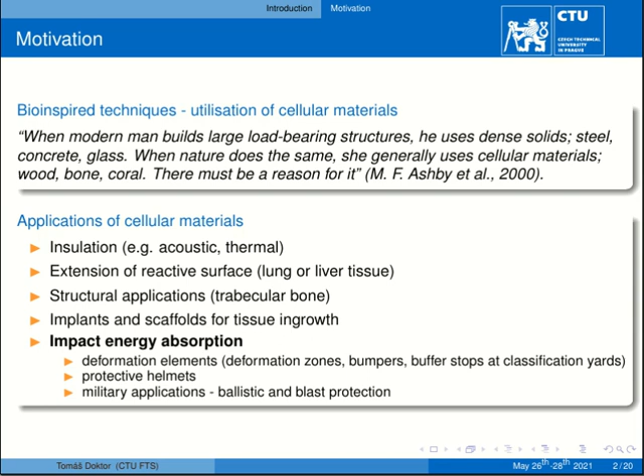The advantage of cellular materials consists in broader selection possibilities of such a material according to the impact scenarios and the intended protective application. The current effort in utilization of cellular materials consists in enhancement of impact energy absorption in such cellular materials, when the cellular structure can have controlled properties and can form a regular lattice, for instance auxetics.

This work is focused on that. This direction was enabled due to extensive development of additive manufacturing techniques.

Another direction for enhancing impact energy absorption properties is the use of filling materials, which form together with the cellular structure a so-called interpenetrating phase composite.

Other possible directions are, for instance, coating of the open cellular structure, which brings enhanced performance, or composition of the cellular structure into sandwich panels. This work is focused on a combination of these approaches.

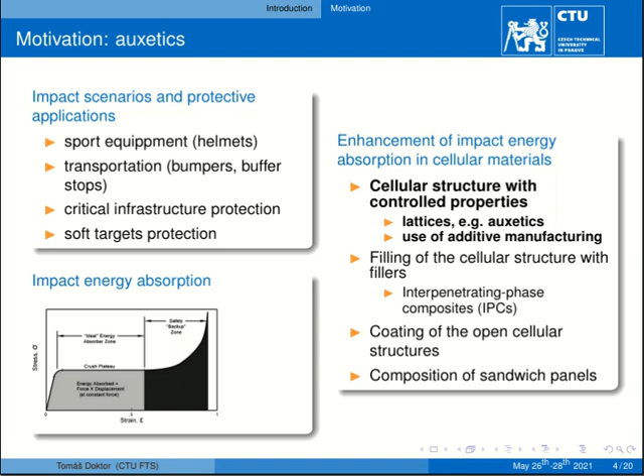Among cellular structures, auxetics are of high importance. Auxetics are mechanical metamaterials which exhibit negative Poisson's ratio. This means that such a structure shrinks under compression, in opposite to standard materials with positive Poisson's ratio.

This brings enhancement of impact energy absorption because the shrinking structure enables concentration of material under the penetrating object, bringing better penetration protection. Such auxetic lattices also preserve the lightweight nature and the possibility to use tailored properties using additive manufacturing techniques.

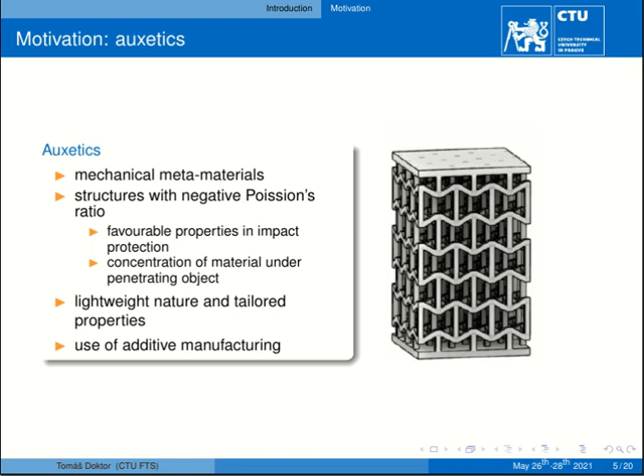Directions to enhance the impact energy absorption consist in filling of the cellular structure with polymeric fillers. Together with the lattice, the filler forms an interpenetrating phase composite.

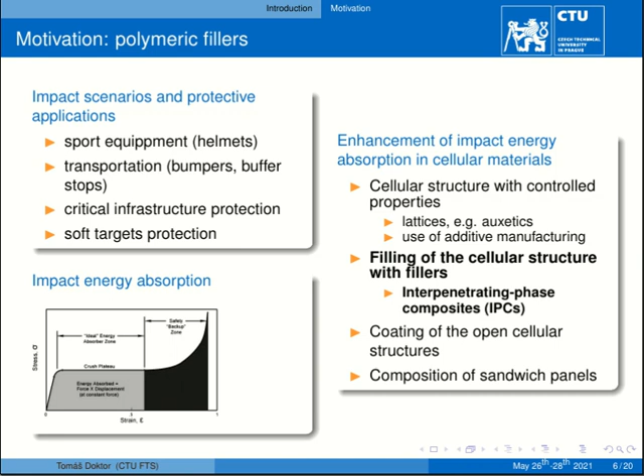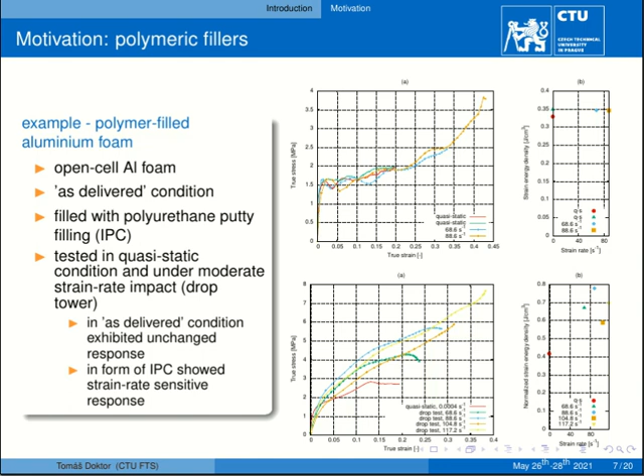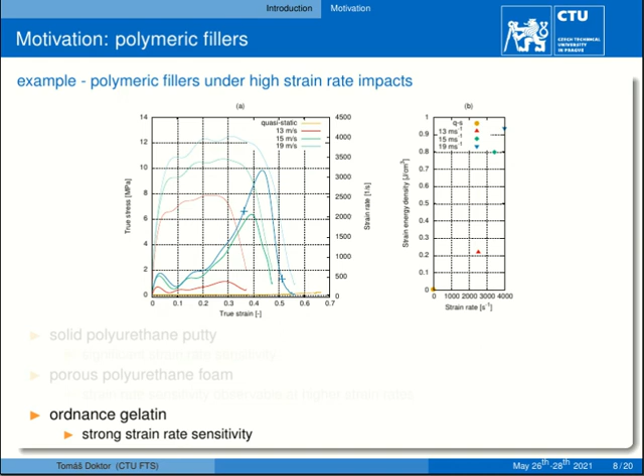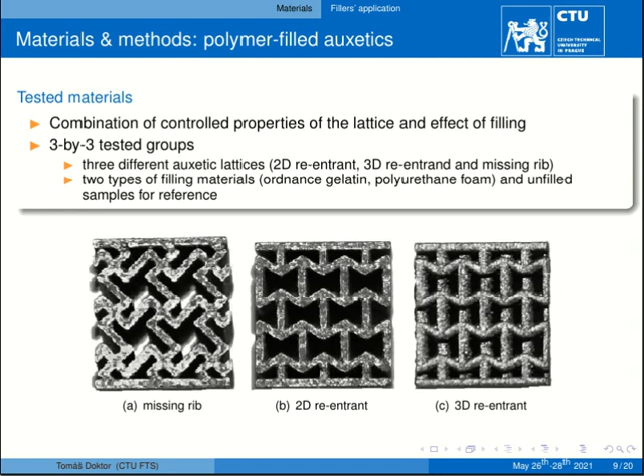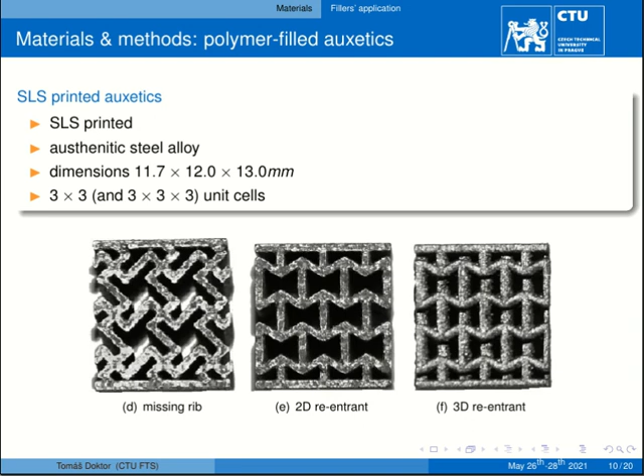In this research we tested a combination of three types of auxetics: two two-dimensional auxetics and one three-dimensional auxetic. These were manufactured using selective laser sintering from austenitic steel alloy, and the design was selected to achieve at least one unit cell inside the structure without being at the contact face.

Two types of polymeric fillers were used: low expansion polyurethane foam and ordnance gelatin, while a third group was kept unfilled for reference.

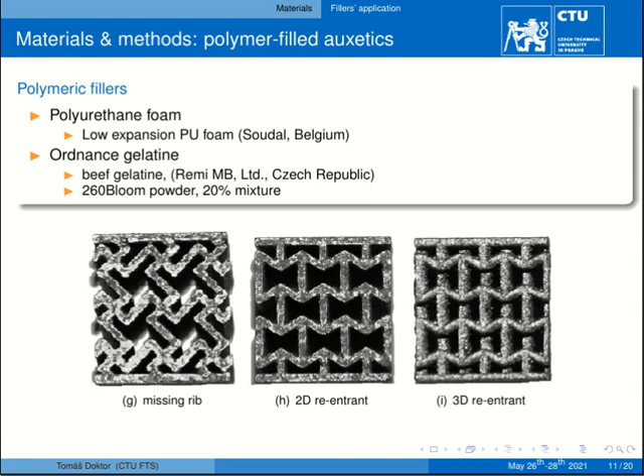The samples were tested in quasi-static conditions and under high strain rate conditions using a split Hopkinson pressure bar apparatus, located at the Czech Technical University in Prague, in the Laboratory of High Strain Rate Phenomena.

This Hopkinson pressure bar is equipped with a 1.6 meter long incident bar and transmission bar, and a 0.2 meter long striker.

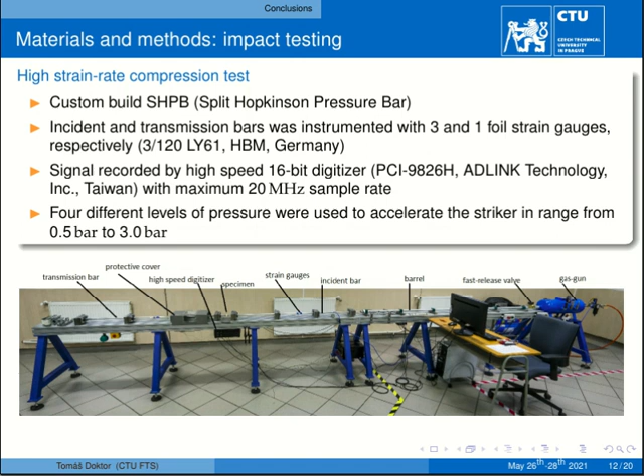The signal from the strain gauges is recorded by a high-speed digitizer, and the loading scene is captured by a high-speed camera with a frame rate higher than 100,000 frames per second, enabling further evaluation of strain at the surface of the deforming sample. These strains were evaluated from the images using a custom digital image correlation tool based on the Lucas-Kanade tracking algorithm.

Using this tool, full field strain measurements were performed from an array of 6x6 features on the surface of each sample. From the displacements obtained by digital image correlation, Poisson's functions were evaluated, and for each sample the dependency between the Poisson's ratio and longitudinal strain was obtained.

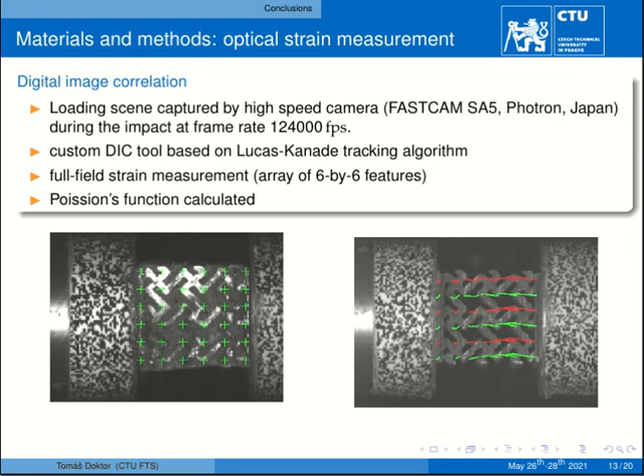For all groups of samples, the results show a slightly positive effect of the filling material on the strain energy density.

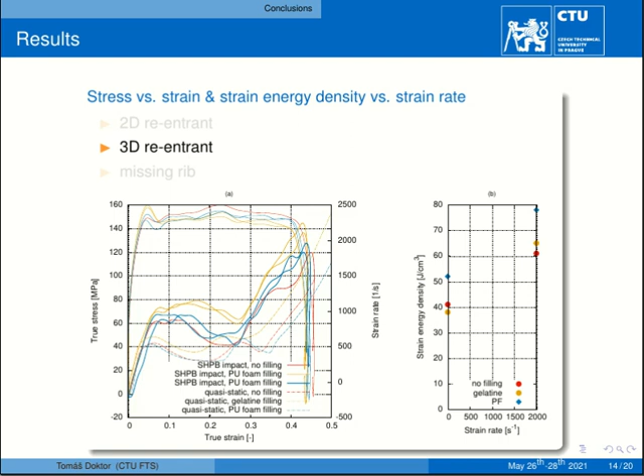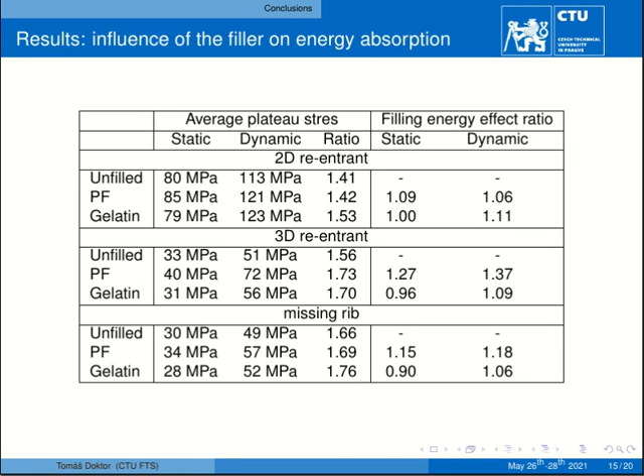In this table, the ratio between unfilled and filled specimens in terms of increase of strain energy density is presented for all types of auxetic structure. You can see that at static condition the increase was not very significant, and even for ordnance gelatin a decrease of strain energy density versus mass was observed. In the dynamic condition, however, all types of auxetics with both types of filling show increased strain energy absorption properties.

Now to the core of the results of this investigation: while the filling exhibits a positive effect on energy absorption properties for all auxetic materials at tested strain rates, the auxetic behavior is suppressed due to the presence of non-auxetic material in the auxetic lattices. The presence of the filling is thus a trade-off between the auxeticity and the enhanced energy absorption properties.

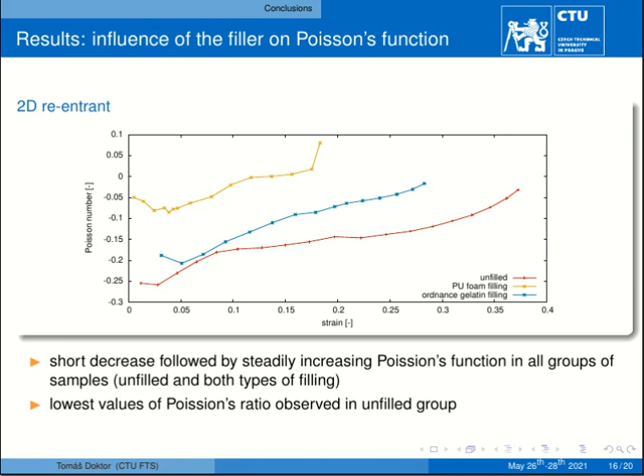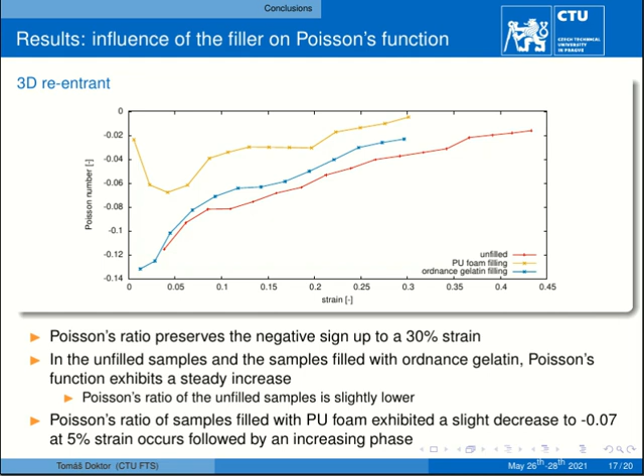For all types of structures, the lowest curve of the Poisson's function is observed for the unfilled samples, while the filled samples exhibit a similar shape of the Poisson's function but with a higher Poisson's ratio. The same pattern repeats in the three-dimensional reentrant samples and also for the missing rib samples.

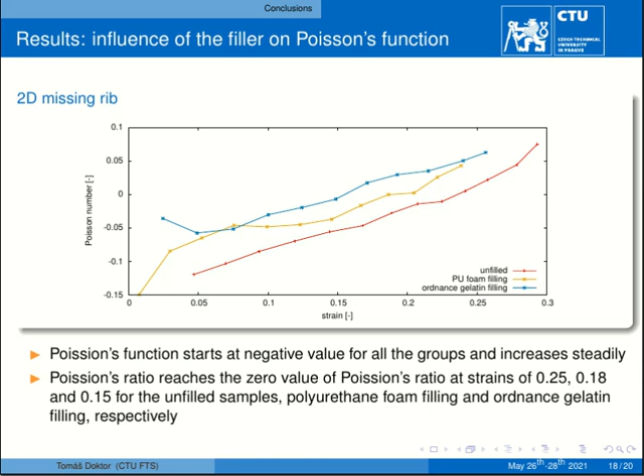Now briefly to the conclusion. The SHPB apparatus in the Laboratory of High Strain Rate Phenomena and Dynamic Testing of Czech Technical University in Prague was used to evaluate the influence of polymeric fillers on the auxetic behavior of additively manufactured auxetic lattices. The optical strain measurement using a custom DIC tool was successfully applied for full field strain measurement, enabling Poisson's function evaluation.

The SHPB tests of polymer-filled auxetics confirmed the positive influence of both types of tested filling at dynamic strain rates. On the other hand, the optical measurement of the strain at the surface of the samples showed a slight suppression of the auxetic nature of the tested lattices.